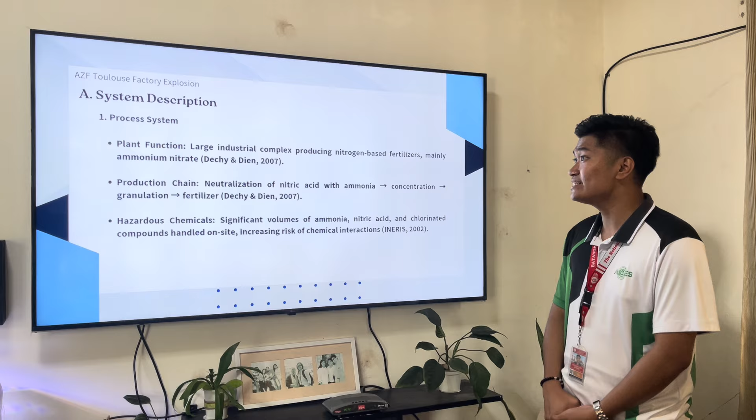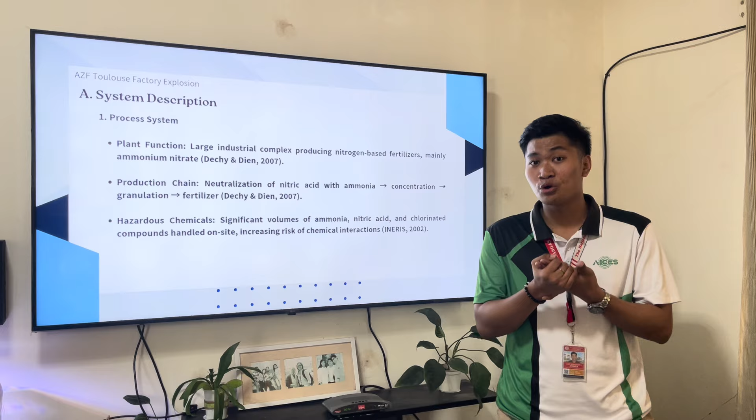System description: according to Dechy and Dien 2007, the AZF plant in Toulouse was a large industrial complex producing nitrogen-based fertilizers, mainly ammonium nitrate. The production chain involved neutralizing nitric acid with ammonia, followed by concentration, granulation, and fertilizer production. However, as INERIS 2002 notes, the facility handled significant volumes of hazardous chemicals—ammonia, nitric acid, and chlorinated compounds—which increased the risk of dangerous chemical interactions.

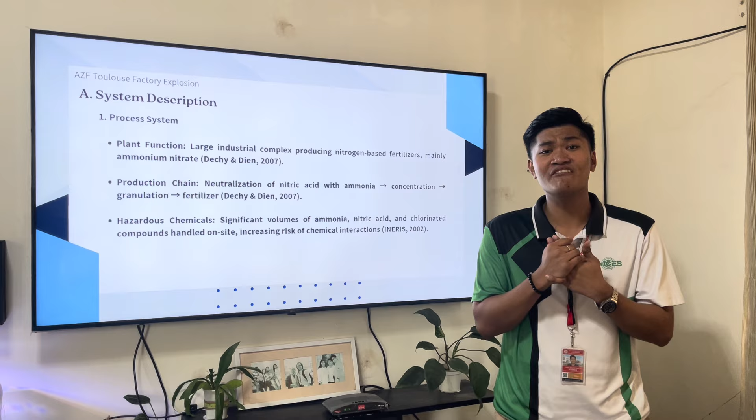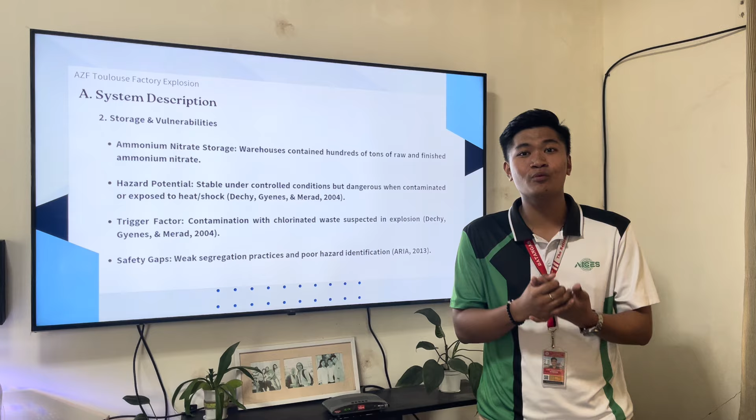For storage and vulnerabilities, the warehouse contained hundreds of tons of ammonium nitrate. Dechy, Gyenes and Merad 2004 explained that while ammonium nitrate is stable under controlled conditions, it becomes dangerous when contaminated or exposed to heat or shock. In fact, contamination with chlorinated waste was suspected as the trigger factor in the explosion. ARIA 2013 further highlights weak segregation practices and poor hazard identification as major safety gaps.

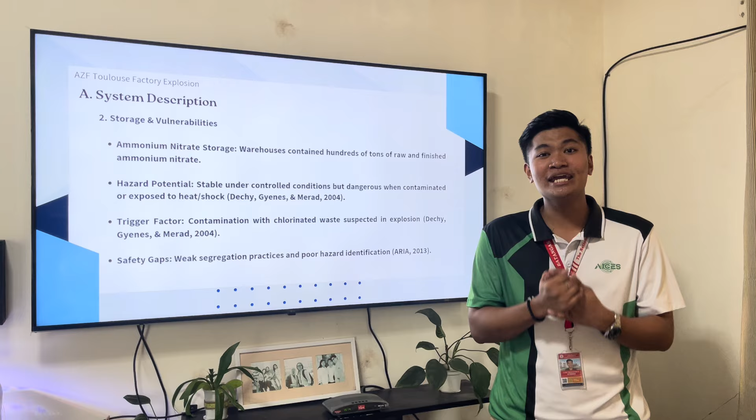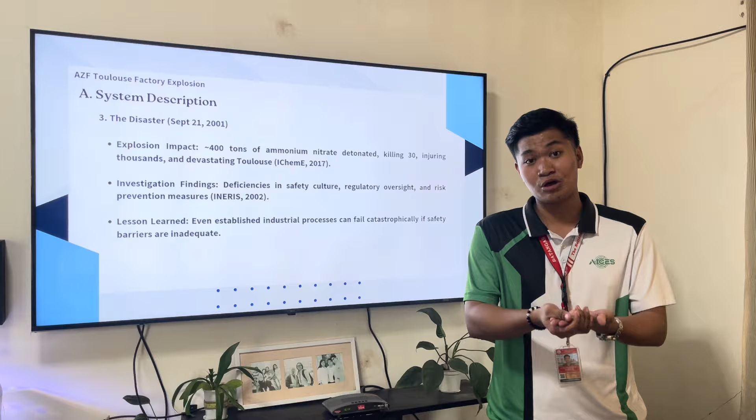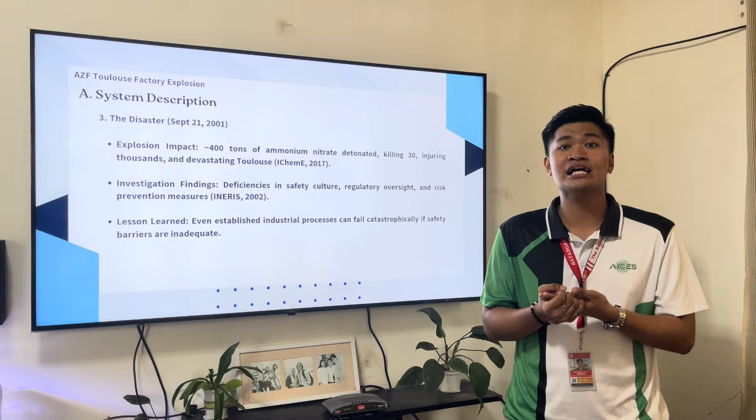On September 21, 2001, the disaster occurred: approximately 400 tons of ammonium nitrate detonated, killing 30 people, injuring thousands, and devastating Toulouse. IChemE 2017 and investigations by INERIS 2002 revealed deficiencies in safety culture, regulatory oversight, and risk prevention measures. The key lesson, as emphasized by these reports, is that even established industrial processes can fail catastrophically if safety barriers are inadequate.

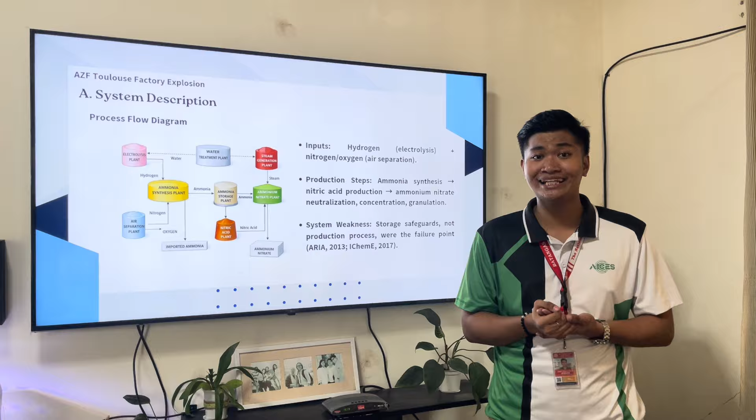For the process flow diagram, the diagram illustrates the interconnected systems of the AZF plant. Inputs included hydrogen from electrolysis and nitrogen and oxygen from air separation. This fed into ammonia synthesis, nitric acid production, and finally ammonium nitrate neutralization and granulation. According to ARIA 2013 and IChemE 2017, both stressed that the production process itself was not the failure point. The real weakness lay in the storage safeguards, which were insufficient to prevent disaster.

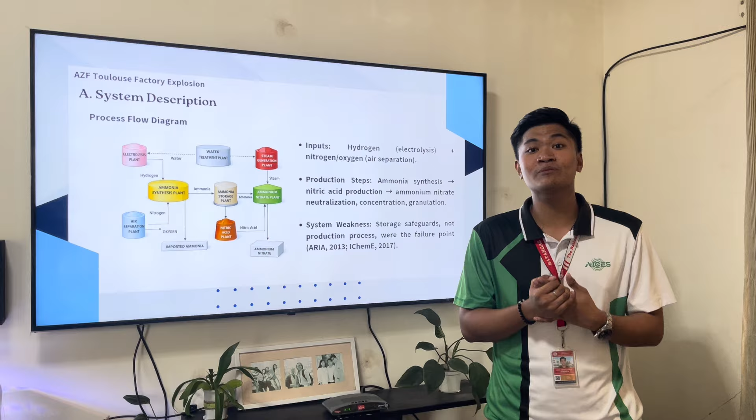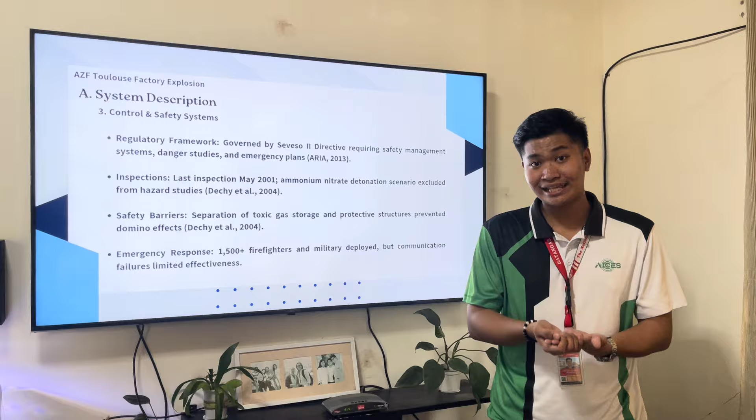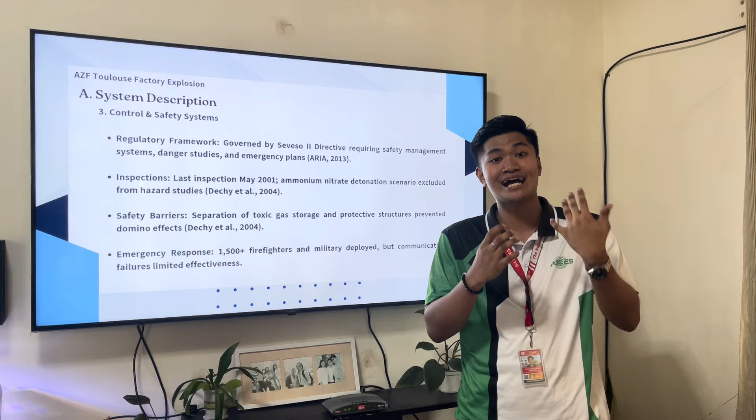For control and safety systems, the plant operated under the Seveso II directive, which required safety management systems, danger studies, and emergency plans. The last inspection was in May 2001, but Dechy et al. 2004 note that ammonium nitrate detonation scenarios were excluded from the hazard studies, while protective structures prevented domino effects in toxic gas storage. Warehouse Shed 221 lacked dedicated safety instrumented systems.

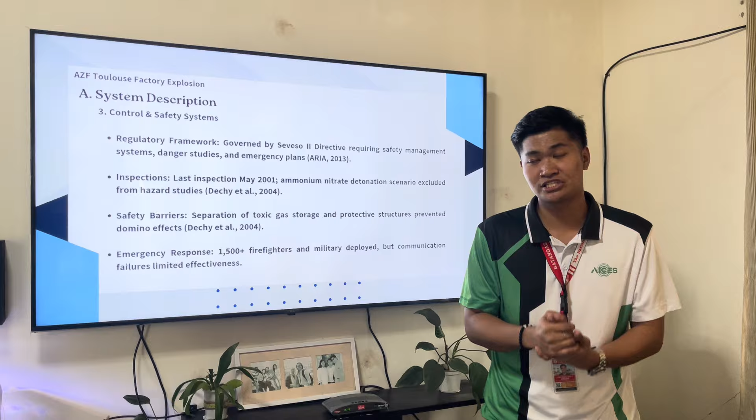During the emergency, more than 1,500 firefighters and military personnel were deployed, but ARIA 2013 reports that communication failures limited their effectiveness. For the next part, will be presented by my groupmate Irish.

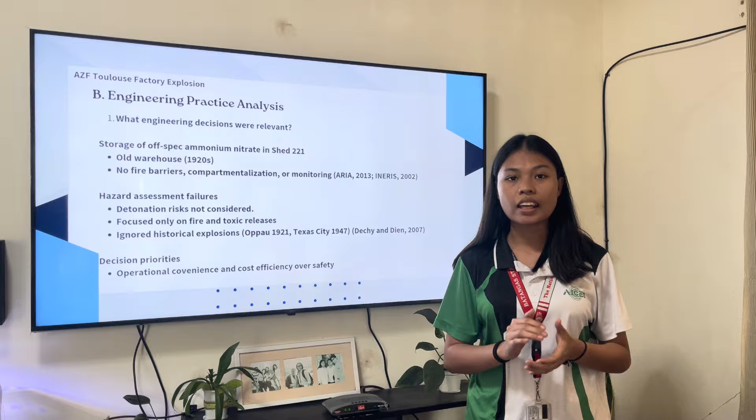Next, the engineering practice analysis. This includes engineering decisions that are relevant. The AZF disaster was partly caused by some key engineering decisions. First, the plant stored a large amount of off-spec ammonium nitrate in Shed 221, an old warehouse built in the 1920s. It didn't have fire-resistant barriers, compartments, or any monitoring systems.

Second, hazard studies and safety reports did not consider the possibility of an ammonium nitrate detonation. They only focused on fire or toxic releases, even though similar explosions happened in the past, like in Oppau in 1921 and Texas City in 1947. Many decisions at the plant prioritized operational convenience and cost over safety. All of these choices made the plant more vulnerable and contributed to the explosion.

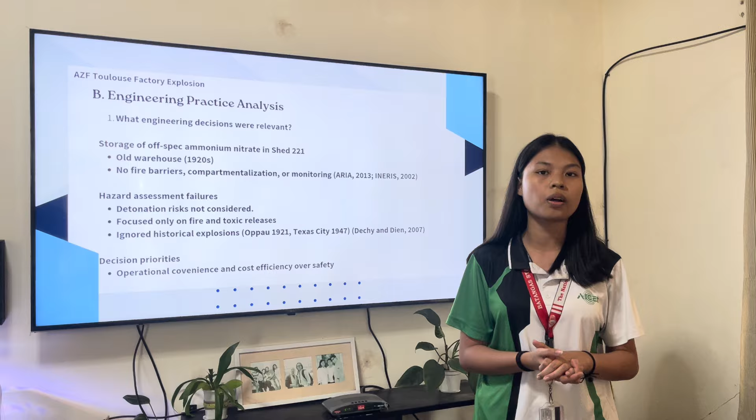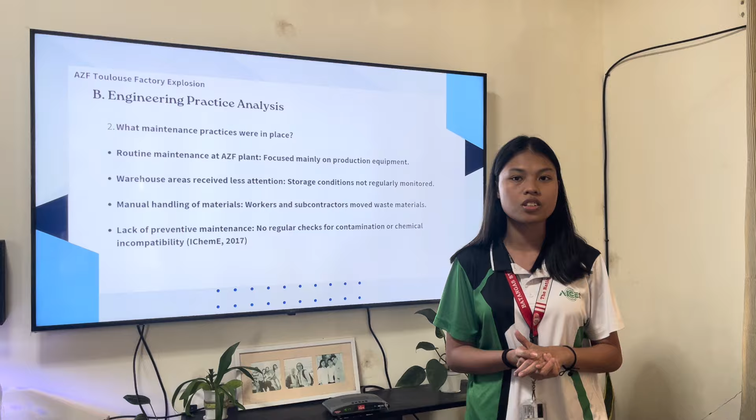Next is maintenance practices held in place. Maintenance at the AZF plant was done regularly, but it mainly focused on production equipment. The warehouse area, especially Shed 221, did not receive the same level of attention. Storage conditions were not closely monitored, so possible contamination or chemical mixing could go unnoticed. The handling of waste materials also relied mostly on workers and subcontractors. Because there was no strong preventive maintenance system for the storage area, hazardous conditions could develop without being detected.

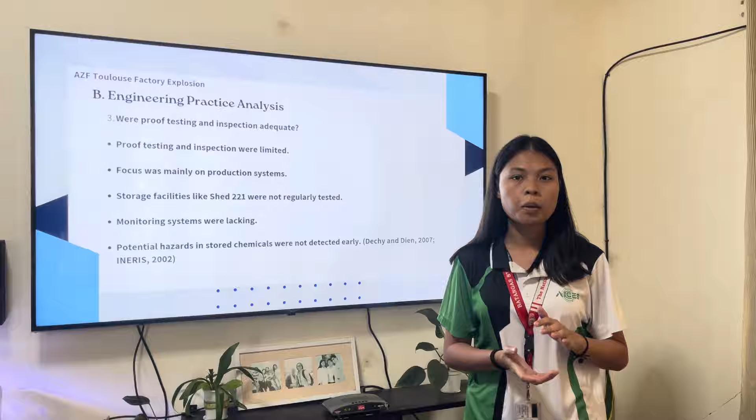Third is proof testing and inspection being adequate. The proof testing and inspection at the AZF plant were not enough. Most inspection focused on the machines used in production, but the storage building like Shed 221 was not checked as carefully. There were also no proper monitoring systems to detect if dangerous chemicals were mixed or contaminated. Because of this, the risk inside the storage area was not noticed early, which increased the chance of a serious accident.

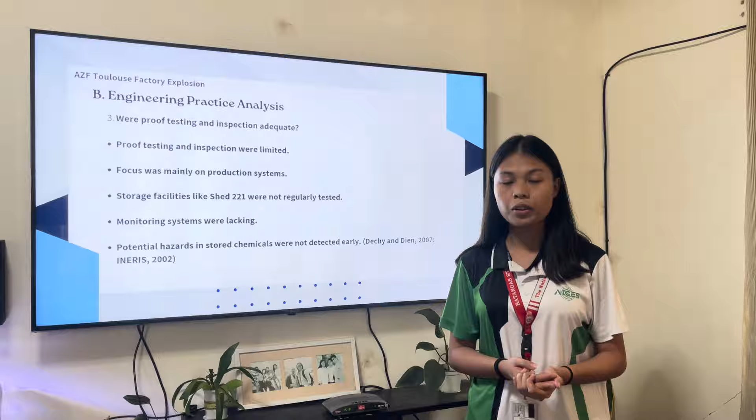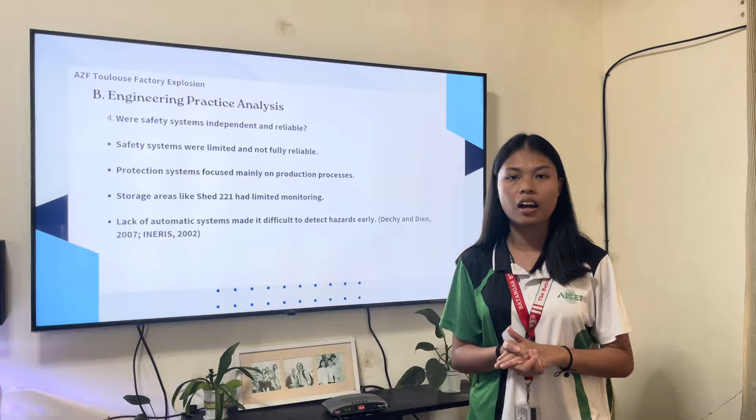And the last one is the safety system being independent and reliable. Safety systems at the AZF plant were mainly designed for production processes. However, the warehouse such as Shed 221 had limited monitoring and protection systems. Because of this, possible hazards in the stored chemicals were not detected early. This shows that the safety systems were not fully reliable for all areas of the plant, especially in the storage facility. For the next part, to be presented by Bea.

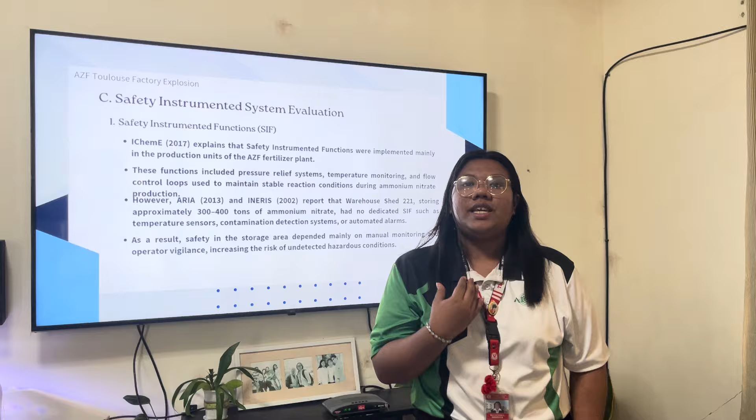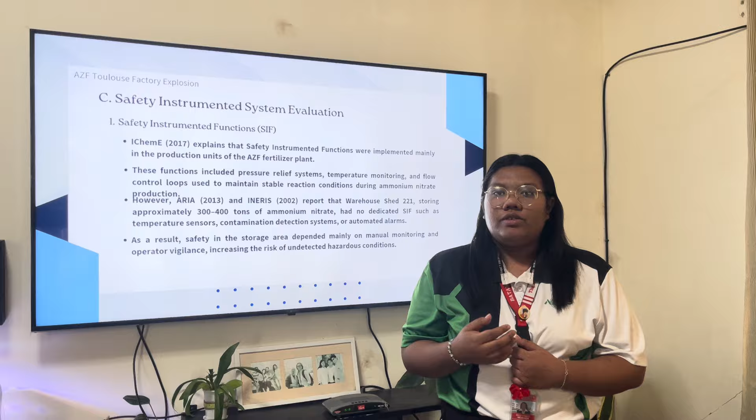In evaluating the safety instrumented systems of the AZF Toulouse plant, three key engineering aspects were analyzed: the presence of safety instrumented functions, the independence of safety systems from operational control, and the reliability of the safety architecture through redundancy and testing. First, regarding safety instrumented functions, these were primarily implemented in the production units of the plant. According to IChemE, the ammonia and ammonium nitrate production processes use control loops such as pressure relief systems, temperature monitoring, and flow control to maintain stable operating conditions. These systems help prevent dangerous deviations during chemical reactions.

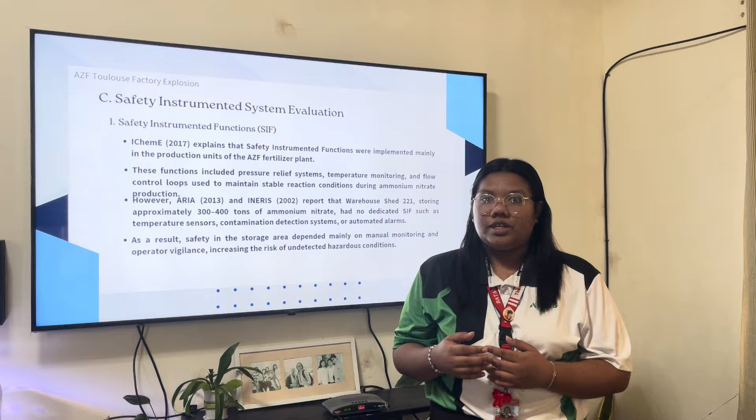However, reports from ARIA and INERIS indicate that the main storage warehouse, Shed 221, which contained approximately 300 to 400 tons of ammonium nitrate, did not have dedicated safety instrumented functions.

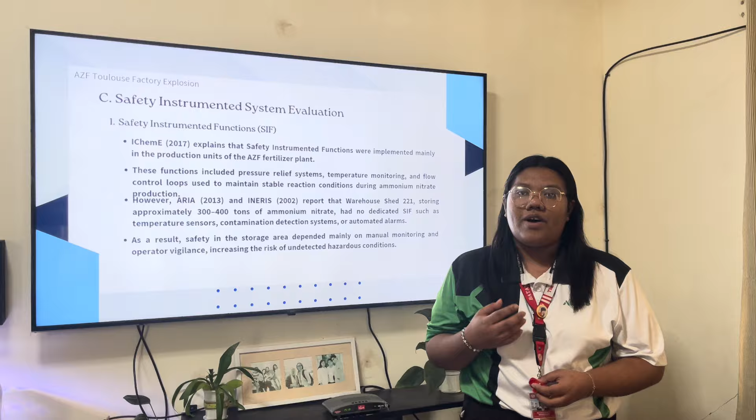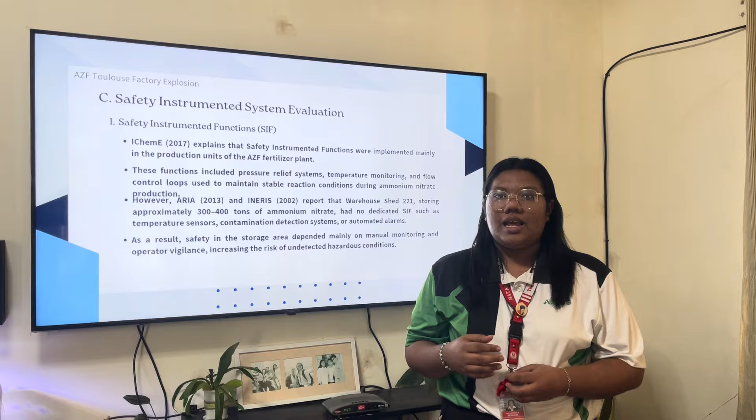There were no automated temperature sensors, contamination detection systems, or alarm systems installed in the storage area. Because of this, hazard detection relied mainly on manual observation by workers, which significantly increases the risk that unsafe conditions may develop without being detected early.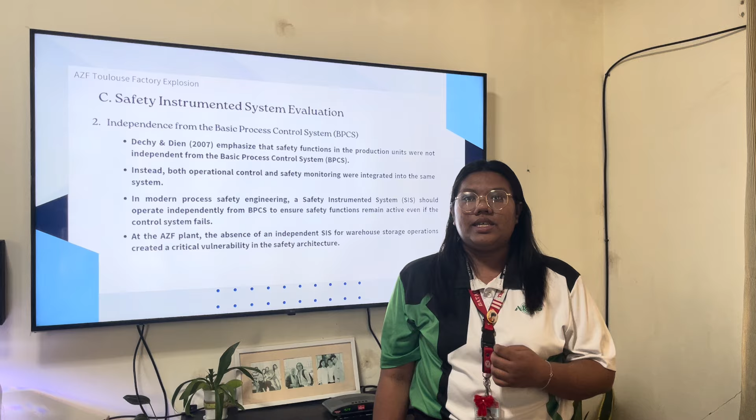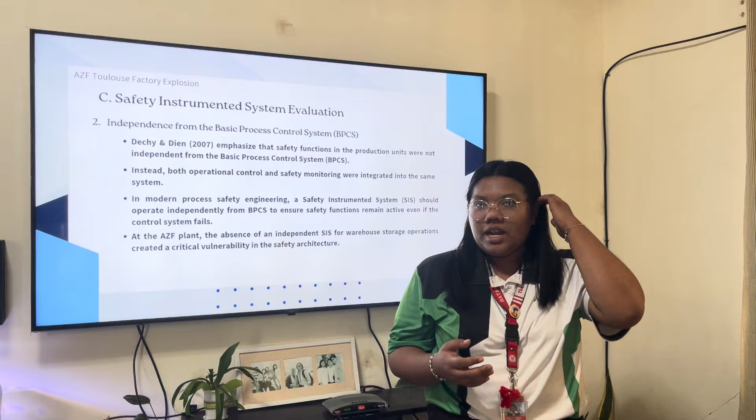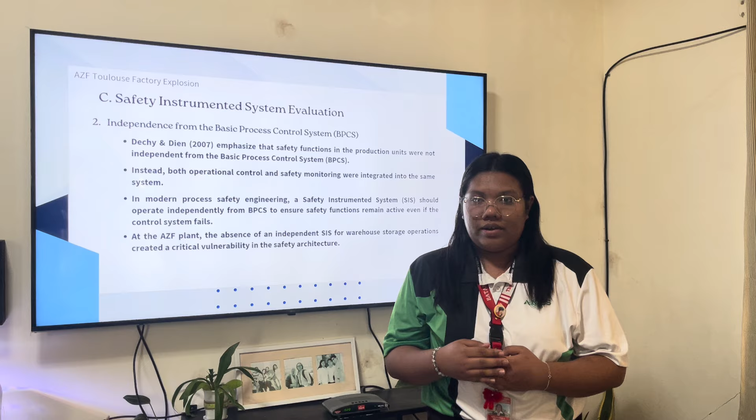The second issue is the lack of independence between safety systems and the basic process control systems. In modern process safety engineering, a safety instrumented system should be separate and independent from the operational control system, so that the safety functions remain active even if the control system fails. However, Dechy and Dien explained that in the AZF plant, safety monitoring was integrated with the same control infrastructure used for normal plant operations. This integration reduces reliability because a failure in the control system could also disable safety functions, eliminating an important protective barrier.

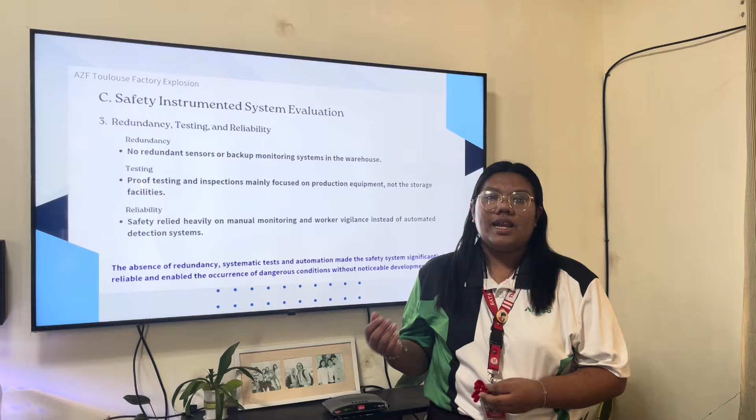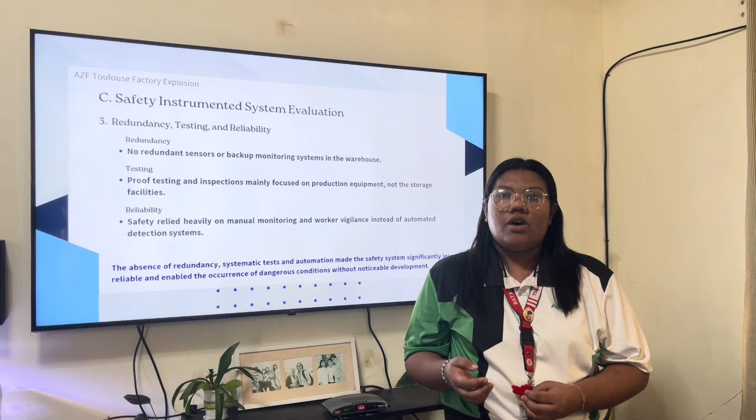The third factor involves redundancy, testing, and overall reliability. Effective safety systems typically use redundant sensors and backup monitoring systems to prevent single points of failure. In the AZF warehouse, investigation showed that no redundant monitoring devices were installed. In addition, proof testing and maintenance inspections were focused mostly on the production equipment rather than storage facilities. As a result, the storage area depended heavily on manual supervision instead of automated monitoring, which reduces the reliability of hazard detection. The next part is discussed by Jay.

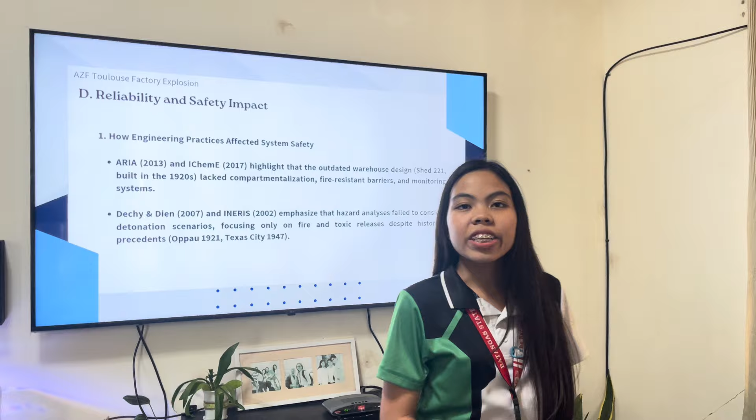Okay, thank you. The next part is the reliability and safety impact. It includes how engineering practices affected system safety.

ARIA 2013 and IChemE 2017 highlight that Shed 221, built in the 1920s, was outdated and lacked essential safety features such as compartmentalization, fire-resistant barriers, and monitoring systems. This structural weakness made the warehouse highly vulnerable to hazardous incidents.

Dechy and Dien 2007 and INERIS 2002 emphasized that hazard analyses conducted before 2001 did not consider ammonium nitrate detonation as a credible risk. Instead, they focused only on fire and toxic releases, overlooking historical disasters like Oppau 1921 and Texas City 1947, which had already demonstrated the explosive potential of ammonium nitrate.

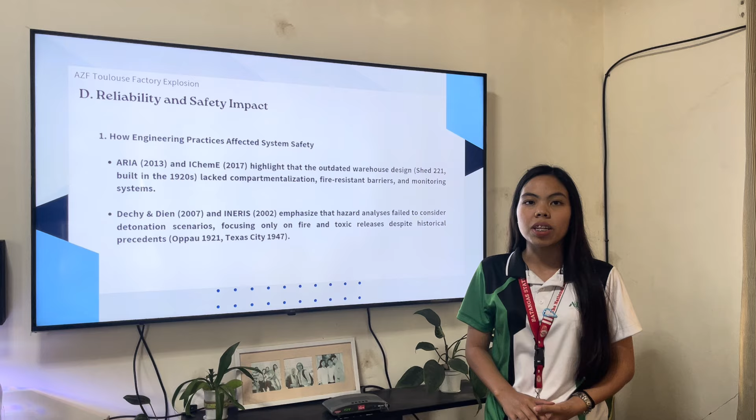IChemE 2017 notes that safety instrumented systems, or SIS, were installed in production units but not extended to warehouses. As a result, storage operations relied solely on basic controls and operator vigilance, without independent safeguards or automated monitoring.

ARIA 2013 documents that poor segregation practices allowed ammonium nitrate residues to be stored in close proximity to incompatible substances such as chlorinated compounds. This unsafe arrangement increased the likelihood of chemical reactions that could destabilize the stored material.

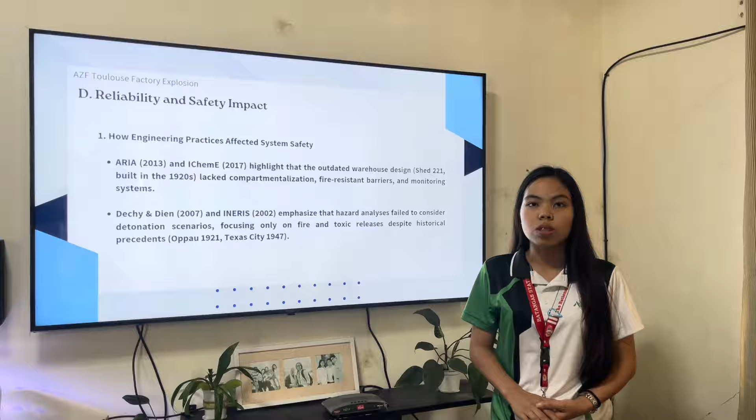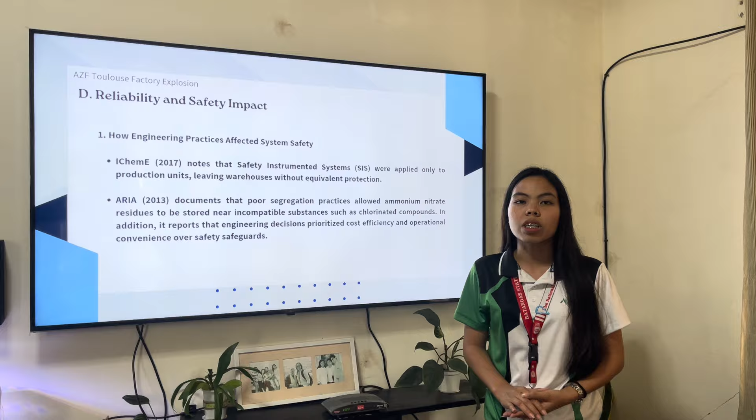Next is the nature of failure. First is the design failure. ARIA 2013 identifies that the warehouse structure was outdated and unsafe for hazardous material storage. Shed 221, built in the 1920s, had not been modernized to meet contemporary safety standards, leaving it structurally incapable of mitigating risks associated with unstable chemicals.

ICHEME 2017 points out that the warehouse lacked compartmentalization, fire-resistant barriers, and monitoring systems. These missing features meant that hazardous materials were stored in bulk without physical or technological safeguards, significantly increasing the likelihood of escalation in case of contamination or instability.

For the maintenance failure, Dechy et al. 2004 explains that inspection routines were irregular and systematic proof testing was absent. This failure allowed potential hazards such as contamination, moisture ingress, or chemical incompatibility to remain undetected until they contributed to the disaster.

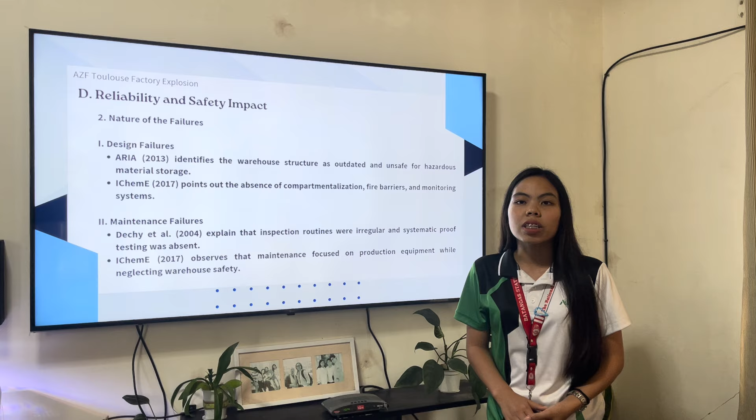Next is ICHEME 2017, which observes that maintenance practices were heavily focused on production equipment while warehouse safety was neglected. This imbalance reflected a reactive approach to maintenance, where storage conditions were not treated as a critical safety domain despite their inherent risks.

Next is operational failures. Dechy and Dien 2007 described unsafe handling of off-spec ammonium nitrate residues. These residues were moved into storage without proper risk assessment, exposing the facility to instability.

The last one is ARIA 2013, which records that subcontractors responsible for waste management were inadequately trained in chemical hazards. This lack of training led to unsafe mixing of incompatible materials, further increasing the risk of detonation.

And the last is integration failures. ICHEME 2017 stresses that safety instrumented systems were applied to production units but not extended to warehouses. As a result, storage operations relied solely on basic process control and operator vigilance, leaving them vulnerable to human error.

And the last is ARIA 2013, which reveals the absence of independent safeguards, redundant monitoring, or automated alarms in warehouses. This lack of integrated safety system created critical vulnerabilities as there were no mechanisms to detect or respond to instability in stored ammonium nitrate. Next part will be presented by Nico.

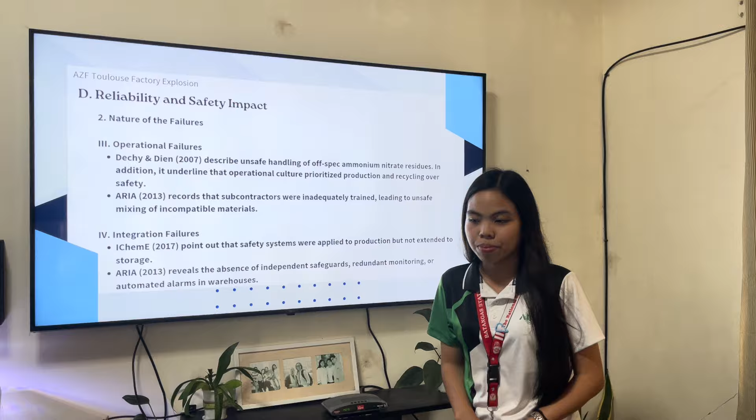Thank you, Jade. Now for engineering improvements, the AZF disaster showed the importance of improving engineering systems in chemical facilities to address design flaws, poor maintenance, and weak safety systems. Storage warehouses should be modernized with compartmentalization, fire-resistant barriers, and proper segregation of ammonium nitrate from incompatible materials to reduce the risk of contamination and explosions.

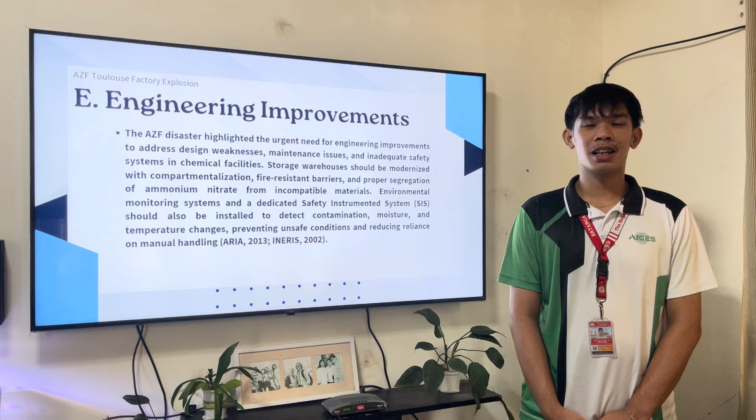Facilities should also install environmental monitoring systems and a dedicated safety instrumented system to detect early signs of hazards such as moisture, contamination, or temperature changes.

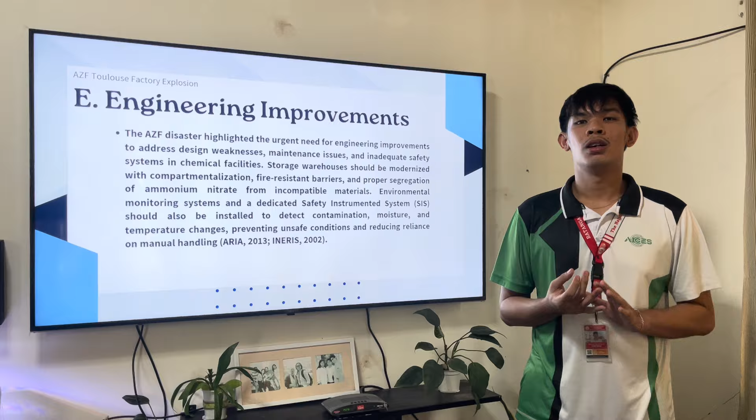According to ICHEME 2017, maintenance practices should move from reactive to preventive and predictive approaches, including routine inspections, safety audits, and continuous monitoring through sensor networks. Proper training and supervision of subcontractors handling hazardous materials is also essential to ensure safe operations.

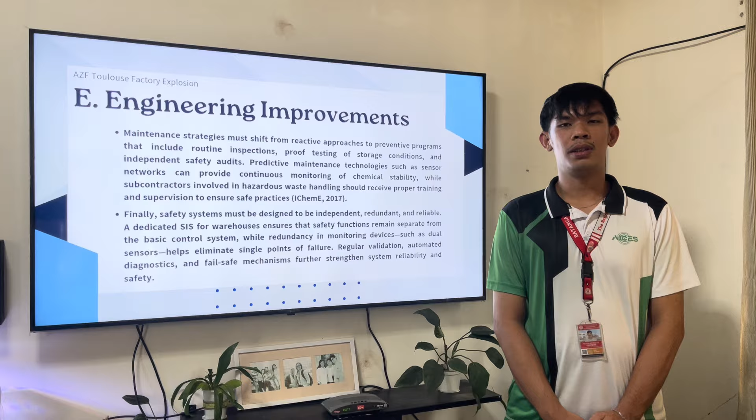And finally, safety systems must be independent, redundant, and reliable. Using dedicated SIS, dual sensors, automated diagnostics, and fail-safe mechanisms helps eliminate the single point of failure and strengthens overall safety in chemical storage facilities. And that's all. Thank you.